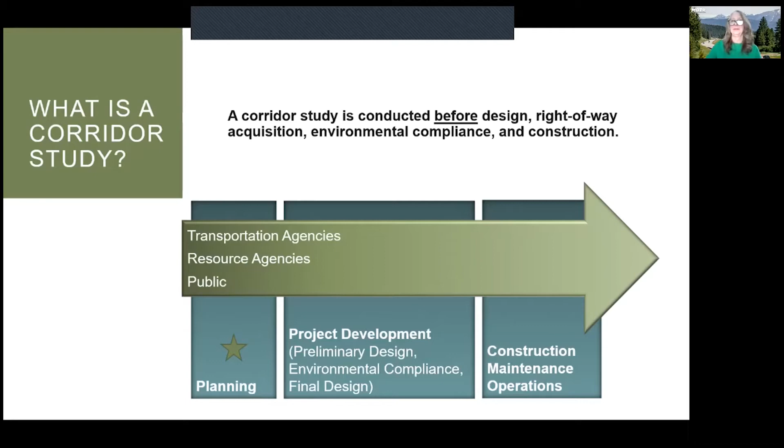All right, thanks, Vicki. So here's what we're going to cover today. We're going to talk about the goals and purpose of the study. We're going to give you an overview of the existing physical features and traffic conditions, and then we'll get into some of the environmental characteristics that we've noted out in the corridor. And then we'll talk about some of the next steps in the study process before opening up for questions.

Let's get into the goals and purpose of the study. Like Vicki had said, we start off with a high-level scan of the study area. And with all the information and input we gather from the public, stakeholders, and agencies, we summarize that into needs and objectives, which are statements we create through collaborative input.

These statements drive the study process into identifying improvement options. Like Vicki mentioned, these might range from a short-term fix for sidewalk connectivity all the way up to full-blown reconstruction and replacement of a roadway. We'll estimate costs, assess potential impacts including environmental impacts, and look at overall feasibility and constructability of potential options.

With all that information, we'll compile all the data we've used to get to that point and package it up, ready for the environmental process, if some sort of project moves forward out of the study.

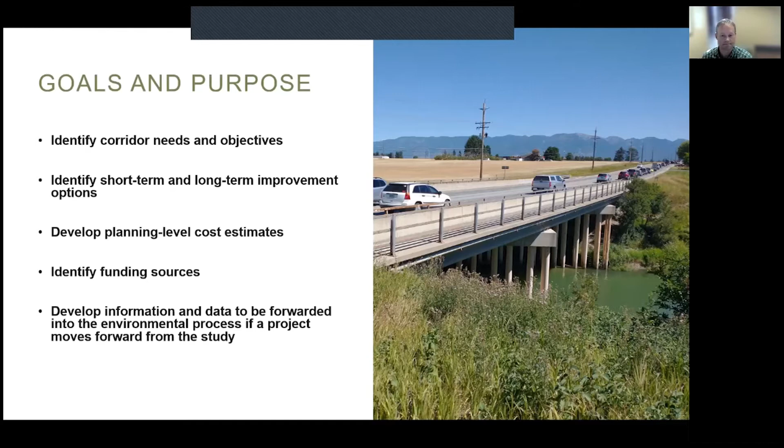So let's review the study area and some of that background information I was talking about, and share some of that with you.

The study area extends from the US 93 intersection all the way east to the US 2 intersection, plus a segment about a half-mile long along Whitefish Stage Road to the north, and about 300 feet south of West Reserve on Whitefish Stage Road to fully encompass that intersection. When we do a corridor study, we usually use a buffer—in this case, 250 feet on both sides, for a total of 500 feet, extending along all of the alignments we're looking at.

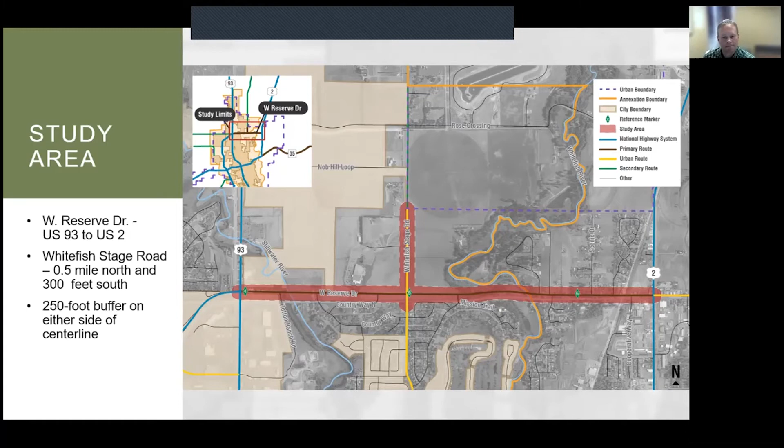So let's get into a little bit of the background. Vicki already touched on some of this. This corridor, West Reserve Drive, serves a wide range of uses including commercial, agricultural, some industrial, and lots of residential. There's rapid growth in the Flathead Valley contributing to the traffic congestion you all see on the corridor today. We understand traffic is becoming an issue, and there are various drivers of growth, so we're taking a look at that with this study.

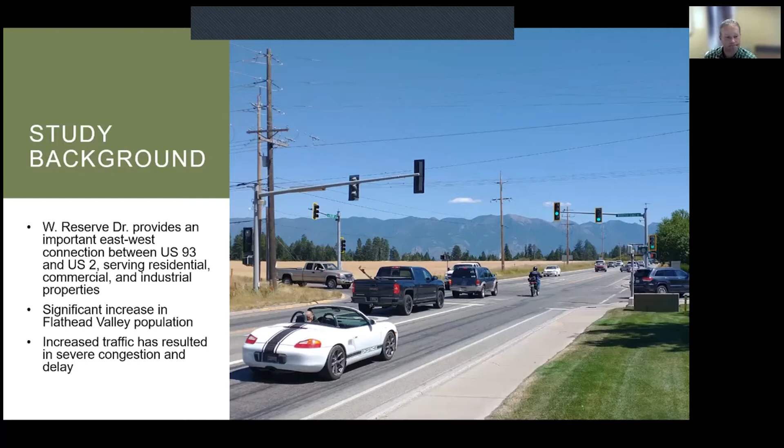Let's get into the study schedule for a minute, and I'll explain the process further. Planning studies typically begin with a review of environmental factors, called an environmental scan. We also compile existing and projected conditions—the physical features and characteristics out on the corridor—and look at traffic, projecting it out to a future date.

Part of what we're looking for is whether we've missed anything—any data or other information we may have overlooked. It's amazing what we get from the public, so it's really important we get that feedback from you during the process.

From that input, our next step will be to develop needs and objective statements—basically identifying broad, overarching goals for the corridor. From those statements and goals, we can move into identifying improvement options, whether related to safety, traffic operations, or environmental resources.

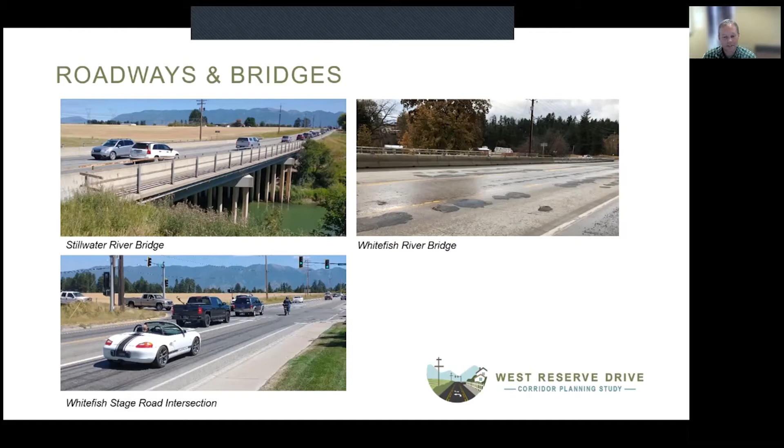We also took a look at the sidewalks and driveways along the corridor, and one thing we noted is that sidewalk connectivity is lacking. Starting at the US 93 intersection, there is sidewalk on both sides, north and south, and those continue over to the east. But by the time you get to the Stillwater Bridge, the north sidewalk falls off and we're left with the south walk continuing on for quite some distance.

It's actually continuous all the way to the Whitefish River Bridge. Shortly after that bridge, though, it terminates, it ends, and then the sidewalk jumps back to the north, and there is no official crosswalk or any sort of feature there to help people across. So we would call that a disconnected sidewalk.

We've noted that. We also noted that the east segment of the corridor is different in that there is a lower speed limit and also a high number of driveways, both residential and commercial, that access West Reserve Drive directly from their properties. So that is a fundamental difference from what you might see on the west segment of the corridor.

So with that, I will turn it over to Sarah, and she is going to talk a little bit about the traffic and some of the analysis that we've done to date.

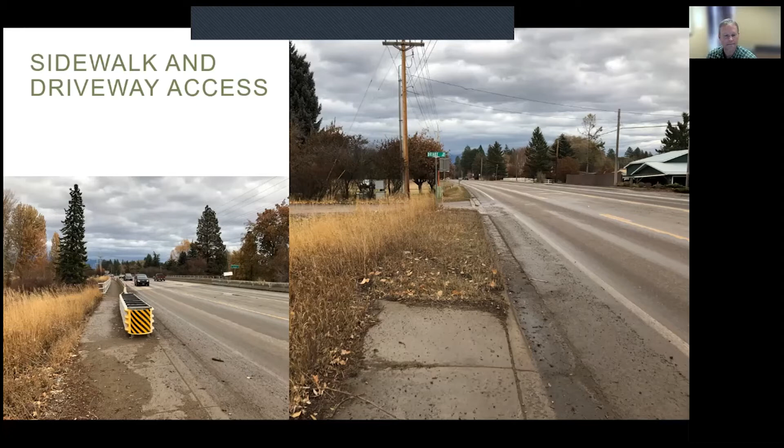As a point of reference, the planning level capacity of a 3-lane road, one with a lane in each direction and a center turn lane, is about 18,300 vehicles per day. So that segment west of Whitefish Stage Road is operating at capacity.

That's evident just from looking at the PM peak hour today, where we see quite a bit of congestion and delay in that segment, particularly on the eastbound approach heading toward the Whitefish Stage Road intersection. We do see long queues during the PM peak hour.

We've looked at historic traffic counts on the corridor, and we've also looked at planning studies in Kalispell to estimate future growth on the corridor for traffic. We've estimated about 2.4% growth per year will occur between now and 2040.

With that 2.4% growth, we're expecting about 30 to 32,000 vehicles per day on the west end of Reserve in 2040, and on the east end of Reserve, about 22 to 25,000 vehicles per day.

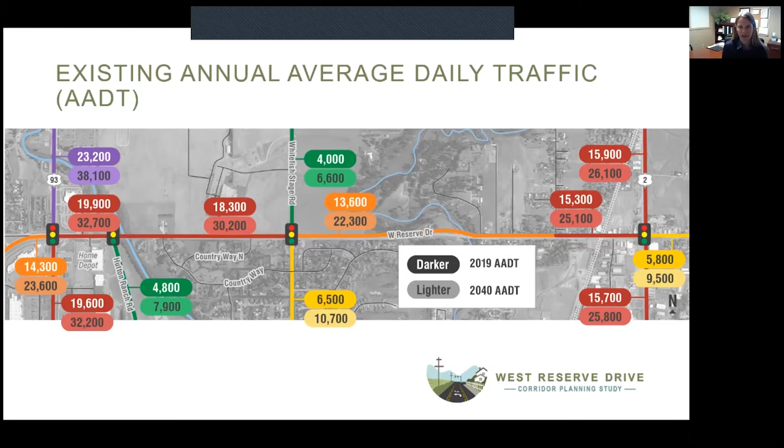So we've looked at the intersection level of service in the PM peak hour, and level of service is a qualitative measure of the quality of traffic flow, ranges from A through F, with E and F representing failing conditions.

For this traffic analysis, we took traffic counts at all 7 intersections back in October 2020. We acknowledge that with the existing COVID-19 pandemic, we do have different travel patterns. We have more people working from home.

Given that information, we compared those October 2020 counts to recent historic counts in the last 2 years at the 3 major intersections: US 93, US 2, and Whitefish Stage. From comparing those counts, we found that the AM peak hour is about 10% lower due to COVID impacts. However, the PM peak hour is only about 3% lower, so not much of a difference in the change in traffic in the PM peak on Reserve.

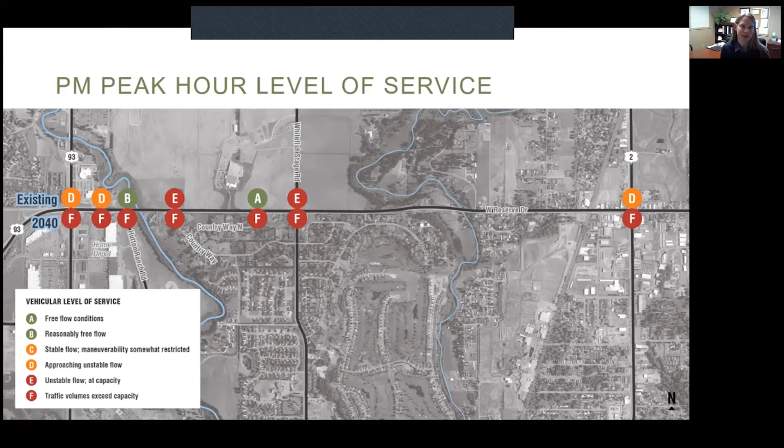Based on that analysis of 10 years of crash data, we saw that the number of crashes per year has doubled over the last 10 years, from about 50 crashes per year to 100 crashes per year.

A couple of reasons for the increase in traffic crashes: first of all, we have seen quite a bit of development in the last 10 years on this corridor. Hutton Ranch Road was completed in 2012, and the Kalispell bypass was completed in 2017. Those 2 intersections have just added conflicting turning movements to the corridor, which naturally increases the number of crashes.

And then we've also seen an increase in traffic congestion in the last 10 years, which contributes to the increase in crashes.

We saw that when we looked at crashes by time of day, the most crashes occurred between 3 and 6 p.m., which is when our traffic congestion occurs. We also see the majority of the crashes are rear end, which is a very common crash type at a signalized intersection in congested conditions.

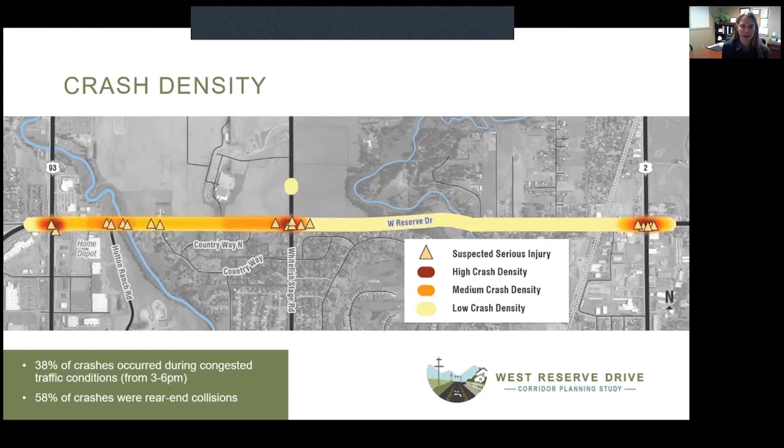So that's all I had to share for the traffic analysis, but I'll hand it back to Cody and he'll finish off this section. Great, thanks, Sarah.

From our review of the study area, we identified some key takeaways to consider as the study moves forward, including some physical features. As I noted before, there's some closely spaced driveways on the east end of the corridor, coupled with some lower speeds. We have gaps in sidewalk connectivity all along the corridor, and the pavement's not in great condition.

As far as traffic conditions are concerned, West Reserve Drive is near capacity, especially on the west end, and we currently have a couple of intersections that are already failing. Based on growth projections, we anticipate that all 7 of those intersections would fail by 2040. From a safety standpoint, crashes have doubled in the last 10 years, and that's a real concern we need to take forward into the study.

We also noted, like Sarah said, that the Whitefish Stage Road intersection had the highest crash rate, which is concerning to us as well.

So with that, I'm going to turn it over to Emily so she can get into some of the environmental overview.

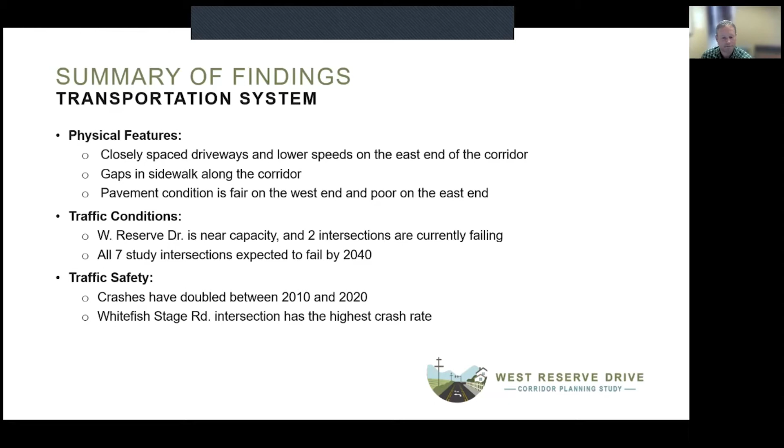Thanks, Cody. As part of this study, we conducted a planning level overview of the existing physical, biological, social and cultural resources within the study corridor to get a better idea of potential environmental constraints and opportunities. The resources we looked at included socioeconomic conditions, land use and farmland, wildlife occurrences and threatened and endangered species, wetlands and floodplains, cultural resources, and hazardous material sites.

I'm going to briefly discuss some of the primary conditions we identified. We looked at census data, and as Cody and Jacqueline have already mentioned, Flathead County and this area are certainly seeing an increase in growth, and this increase is expected to continue for the next 20 years.

We also looked at income in this area, and noticed that Flathead County was quite a bit different from the state of Montana in that it had a high concentration of low and middle income households, but also a very high concentration of very high income households, which is indicative of a recreation resort type community.

We also looked at populations that would fall under environmental justice requirements and executive orders. These types of populations include low income and minority populations. Through our census review, we did not find any high concentrations within the study corridor that could be adversely affected by any of the projects we carry forward from the study.

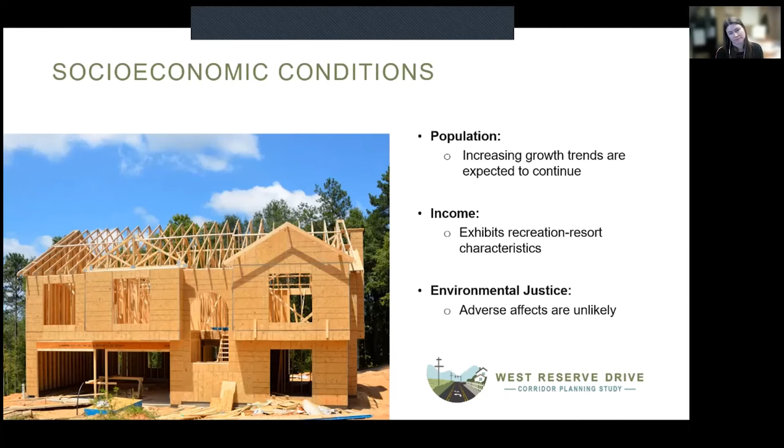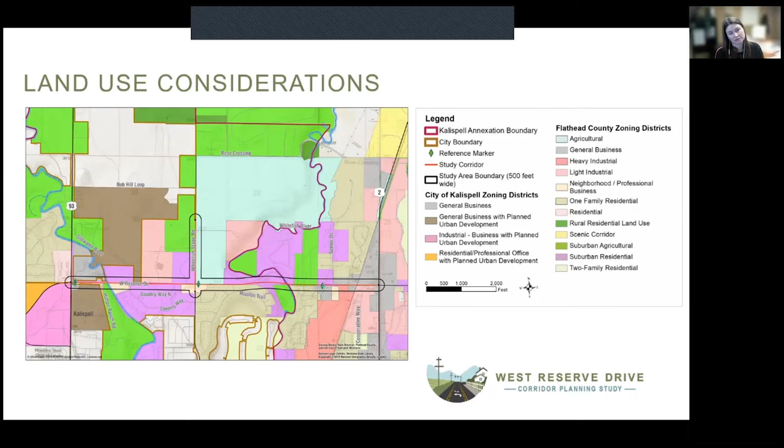On the aquatic resource and biological side of things, there are 2 main rivers that cross the study corridor, the Stillwater River and the Whitefish River. Both of these rivers are designated impaired waters, primarily because they don't support aquatic life beneficial uses, which primarily has to do with the amount of sediment within both rivers.

The Stillwater River does have set maximum pollutant levels that can be discharged into the river on a given day. Whitefish River levels are currently under review, so they haven't been set yet. Both rivers are within 100-year floodplains, so as we look at improvement options, encroachment into floodplains will be one of the things we look at. And there are, of course, always wetlands along these rivers, so looking at where we can avoid or minimize impacts to wetlands will also be considered.

Both of these rivers also have bull trout, a threatened species under the Endangered Species Act. So as we move forward with improvement options, if we're looking at crossing structures or how our improvements affect water quality, those are things we'll need to look at in terms of bull trout. And again, that purple line along the Whitefish River is the annexation boundary for the city of Kalispell, so anything put into the city will have to follow their stormwater water quality requirements outlined by the State Department of Environmental Quality.

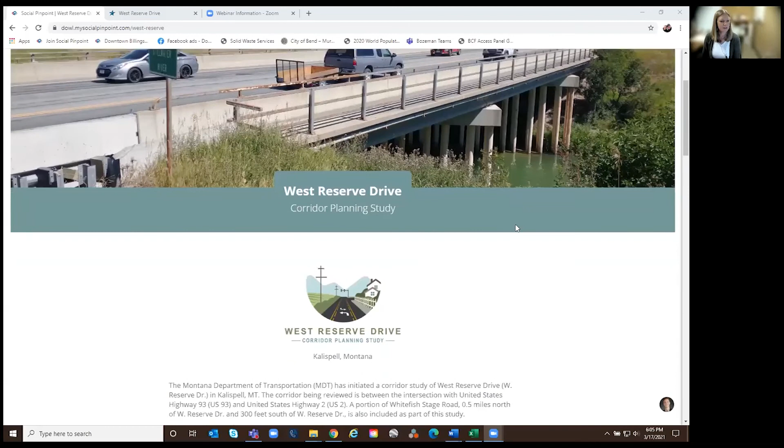So this is a platform to provide feedback. It does also offer another opportunity to learn about the study, provides an overview of the corridor. Down here at the bottom, there are some frequently asked questions, so you can dive into some information there. We will post information about the next public meeting here.

In addition, there are two interactive pieces for you to participate in for us to collect your input. The first is a public forum where you can go on and add comments. You can have a dialogue. You can vote up particular comments that you think are especially relevant to your perspective. Additionally, there is an interactive map where you can provide geographically associated comments.

So to use this, you can zoom in and move around and look at specific features along the corridor. Then there are these little icons at the top related to ideas, making a comment, something I like, safety concerns. You pick whichever is the most relevant to your comment, click it, and drag it down onto the map to make a particular note. So for example, if you think there is a safety concern at this particular intersection, you just drop it right there and add your comment. That's a great way for you to provide really direct feedback to the study team.

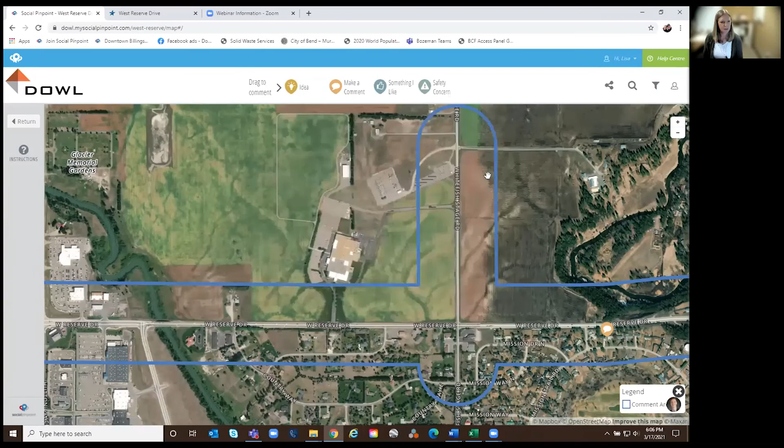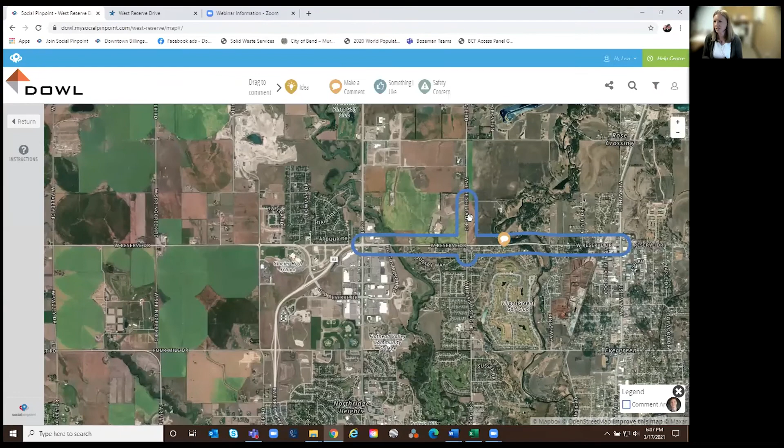So Cody, you can go ahead and take over sharing the screen again. But as we move on, please put your questions or comments into the Q&A function. We did receive one question in advance of the meeting regarding sidewalk connectivity. Cody, do you want to touch on that?

So there was a comment or question about sidewalk connectivity along the corridor. Like I mentioned earlier, we've noted a lack of connection on both sides, north and south. So one of the things we're looking at is what an improvement could be to potentially make that connected. As we move into the needs and objectives of the study, if that's one of the things driving the issues on the corridor, we'll identify options to address that. That's going to be part of our next steps. Once we create these needs and objectives and determine the goals for the corridor study, we'll move forward to identify targeted improvements at various locations. So we are very aware of that lack of sidewalk and understand that could be an issue for people.

So at this point, if you have any questions, do put them into the Q&A. We don't have any other questions at this point.

Lisa, I might just add, public involvement is really important to the study process. We compile a lot of information and do a lot of homework, but at the end of the day we sometimes miss little nuances and details. A lot of folks in the audience today spend a lot of time on this corridor, so if you have any ideas, input, or think we missed something, we'd really appreciate a comment, whether during the presentation or by dropping an email to Vicki or myself, or using any of these platforms. This is an important step in the process, and there are many ways to contribute thoughts: the comment form on the website, the interactive map, direct phone or email. The whole point is there's no wrong answer, we just want to hear your perspectives. It's incredibly important to a study effort like this.